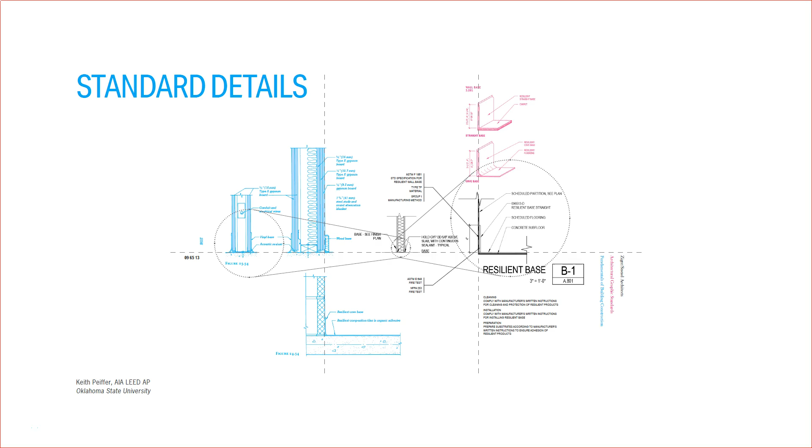To set the context for presenting my paper on the role of standard details in normative contemporary practice, I'd like to briefly mention a project of mine completed while an associate at Ziger/Snead Architects in Baltimore. The project is an adaptive reuse to transform a former movie theater into a black box theater for a small company that develops software for theater productions.

The project was a significant reach for the small company, but they had bold ambitions for investing in the neighborhood and supporting the local theater community. The budget was extremely tight, and as such, so were the architect's fees. The design proposal developed within the specific context and its contingent realities.

The design team assembled the contract documents through well-worn details using proven, mass-produced products, drawing from the firm's Revit template and past projects, following industry standards for their configuration and installation into common assemblies. A regional general contractor that has considerable experience with these products and their installation constructed the project, organizing the means and methods of its construction and sequencing the various subcontractors' work to create a cohesive whole.

The project won an honor award from the Maryland chapter of the AIA, with the jury describing it as a humble but extraordinary renovation. Now, this project will likely not have much disciplinary impact beyond its local community, but it is indicative of much of normative architectural practice in the United States today. Since the standard detail plays a key role in this work and this type of practice, I am focusing on the standard detail as one of the architect's instruments of service that is worthy of further investigation.

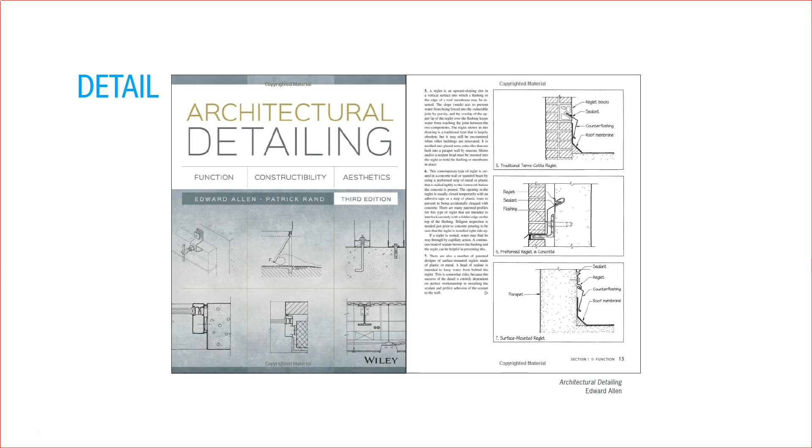A single accepted definition of detail in architecture is hard to come by. In Architectural Detailing, Edward Allen defines details as a set of drawings that aid in the construction of an architectural idea, emphasizing building science and performance. The details covered in this text tend toward conventional or standard construction practices. For Edward Ford, the good detail is actually something quite different. Quote, "non-conforming, exceptional, heretical," end quote, the antithesis of standard.

In discussing his 5 categories of details, Ford argues for the autonomous or subversive detail, a detail that achieves a special autonomy of its own, beyond mere motif, abstraction, or tectonic ambitions. Ford acknowledges an almost mystical quality for these details in articulating the contradiction between abstraction and animation, between understanding a building and feeling a building. He cites numerous details by canonical architects featuring exceptional materials, craft, and configurations.

Rather than try to produce a singular definition of detail, Ford advocates instead for detailing. Detailing shifts the focus from a specific material condition within a building to an act, that of designing. Ford reveals his bias for the highly revered act of design in the subtitles for his detail categories, referring to the first 4 as detail as abstraction, motif, order, and joint, while deviating from parallel structure in his preferred detailing as a subversive activity.

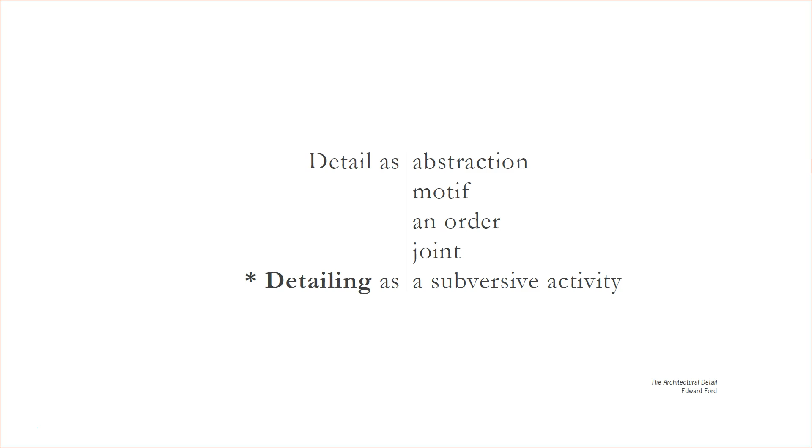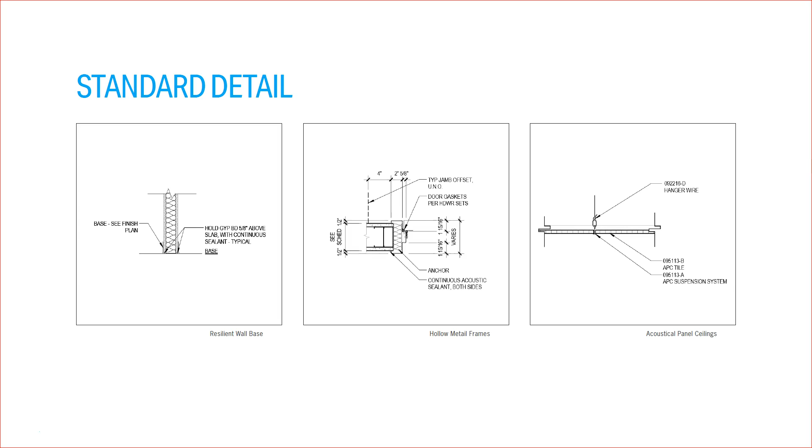So what can we say about the standard detail in architecture? The standard detail exerts power in defining the realm of what is possible during the design process. Standard details exhibit handiness, serving as default positions to be deployed and combined as needed, structuring how the design team works, as well as the resulting design proposal itself. Within a firm, standard details can improve efficiency within the design process, maintain design quality, and produce predictable outcomes.

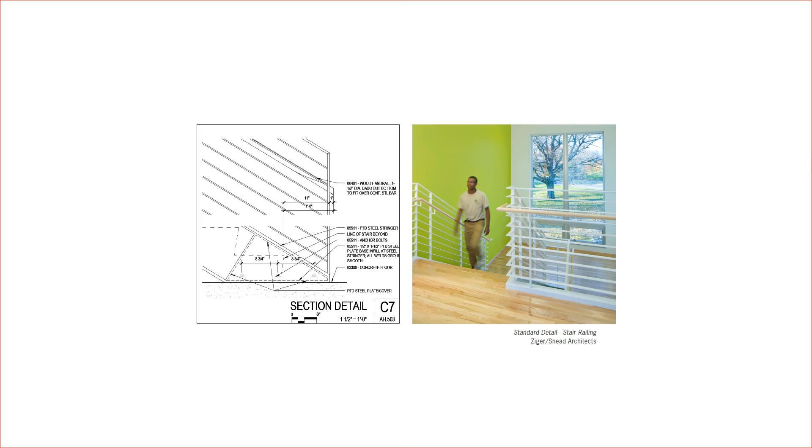Some firms choose to create their own standard details, customized solutions to common design problems that can be used on subsequent projects to increase their efficiency and documentation. Other standard details are much more generic and address typical conditions that are used throughout the discipline and across many different firms. These standard details often involve a series of nested standards, synthesizing relevant product manufacturers and industry reference guides. They typically involve industrialized building products, themselves the manifestation of various standards like ASTM, NFPA, etc.

Industry resources like Architectural Graphic Standards, Fundamentals of Building Construction, and Building Construction Illustrated standards themselves capture these more widely accepted conventions and incorporate technological developments into standard details. Bush asserts that, quote, power is present only when it is performed or enacted, end quote, while often derived directly from manufacturers or industry reference guides. The standard detail achieves agency in a construction project when it is included in a set of contract documents as part of the architect's instruments of service.

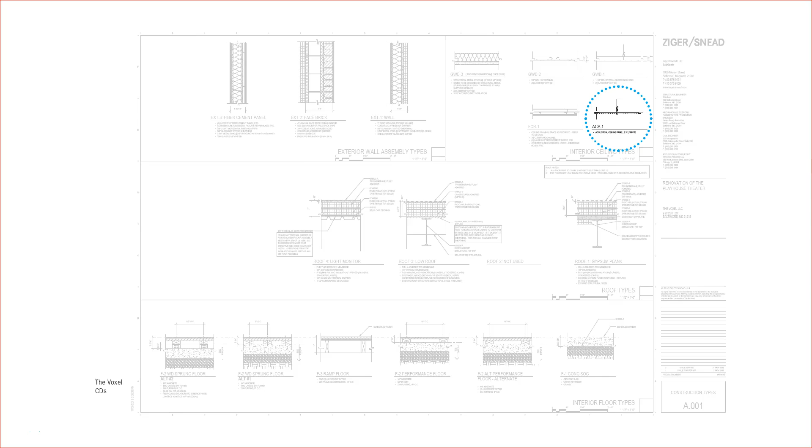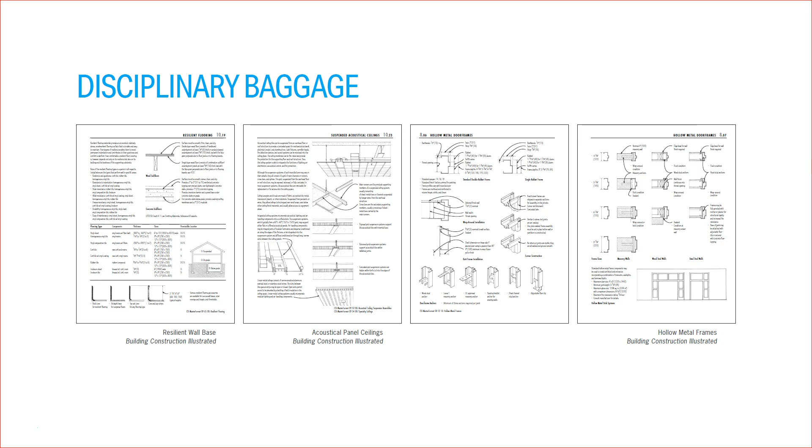If standard details are taught or addressed in disciplinary literature at all, they are typically relegated to technical resources addressing issues of constructability and building science. I think it's worth considering why the theoretical discourse of the discipline chooses not to talk about them.

In his investigation into the history of Architectural Graphic Standards as a social history of the profession of architecture, George Barnett Johnston notes the widening rift between the vocational and the professional identities of the architect in the drafting culture of the time of its early publication. We can clearly see this gap between the content in Architectural Graphic Standards and Ford's discussion of details as indicative of the divide between the vocation and the discipline.

Ultimately, this tension touches on claims about the professional status of architects and their claim to a particular body of knowledge. Typically, architects do not even present themselves as experts in technical aspects of construction, relying instead on product manufacturers, installers, and specialty consultants to offer this expertise as needed. In their well-known sociological investigations into professional practice, Robert Gutman and Dana Cuff note the arcane status of design above other concerns like business practices and building technology.

They ultimately conclude that architecture chooses to uphold design as its master value, highlighting issues of aesthetics and artistic practice over technical expertise. This results in a preference for the novel, poetic detail over conventional building practices or more performance-driven details. However, this aesthetic preoccupation exists in tension with another standard, that of standard of care as defined in the AIA contracts. Standard of care and its emphasis on averageness seems much more closely aligned with the standard detail.

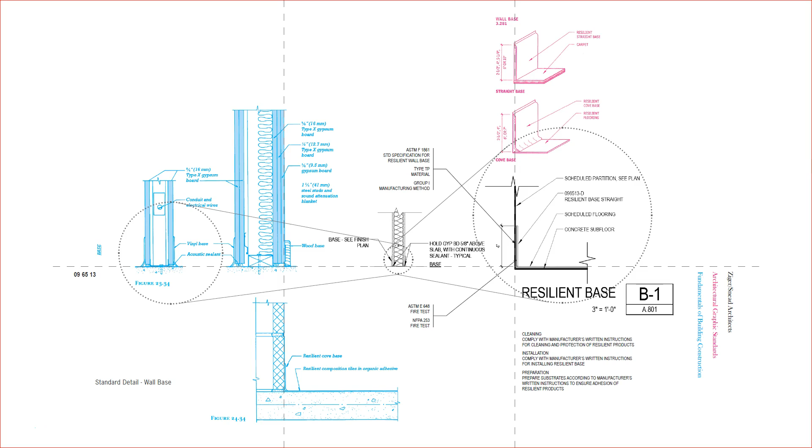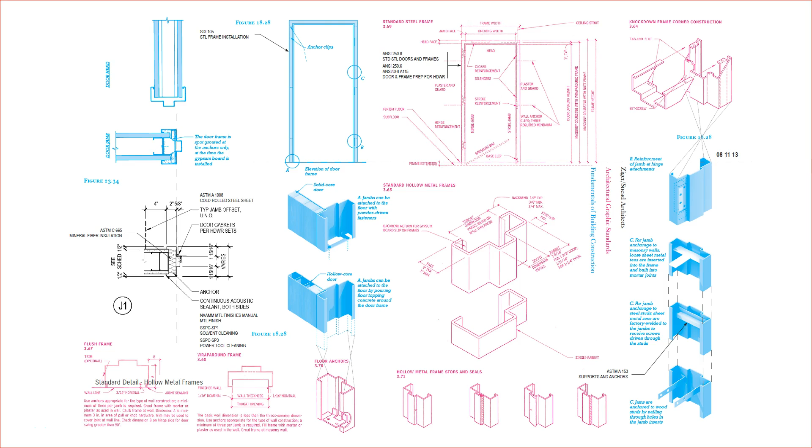In the images here that accompany the paper, I highlight three very common details: resilient wall base, acoustical panel ceilings, and hollow metal frames. These amplified details show the original detail in the contract documents, along with the industry knowledge and standards that they rely on for their efficacy: Architectural Graphic Standards, Fundamentals of Building Construction, and MasterSpec. These standard details are ubiquitous in contemporary architecture, common in many of the buildings we occupy every day. They are adaptable systems, not the singular, perfect execution of an exceptional detail that would merit Ford's attention.

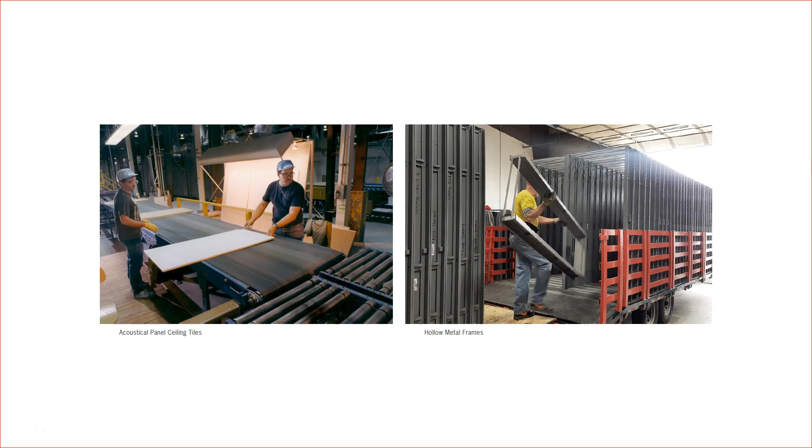Too concerned with their expertise in design, architects generally are not determining these standard details. Instead, they are created from a vast manufacturing and construction industry that has incredible inertia to maintain the status quo.

This paper is the beginning of my scholarly work considering the standard detail, so in further work I'm interested in exploring the following questions. As Johnston highlights, standards can reinforce the status quo or serve as a vehicle for social and technological progress. If standard details are filters, then how can we raise a standard? And how do we determine what needs to be changed? For example, how does a particular standard detail contribute to issues of climate change or social justice and equity? How can architects move beyond more limited views of design to intervene in the much larger ecology of standard details to have more impact?

While they seem natural and at hand as defaults in practice, standard details are assumed and taken for granted in the studio and architectural education. If the Academy were to properly acknowledge the value of standard details in the discipline, architectural education may be forced to shift from the often unexamined primacy of design focused on aesthetic nuances to a broader view of design that considers the actual contingencies of architecture.

As Jeremy Till argues, purity is a myth. We need more people who dare to eschew the greats and the specials and look to the everyday, the social, and the economic as forces that shape architecture. This is the realm of the standard detail.